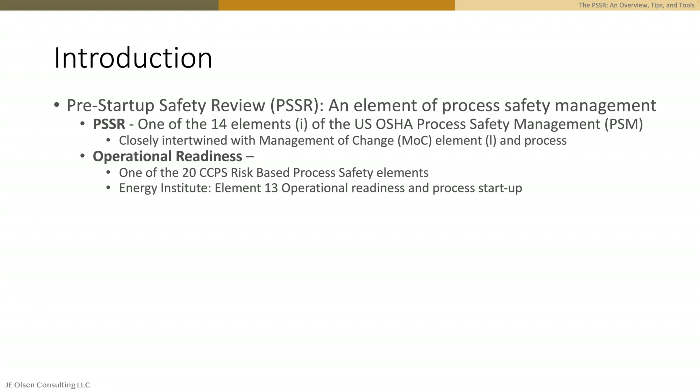To highlight the importance of operational readiness and PSSR, pre-startup safety review, we don't have to look any further than the tragic 1988 Piper Alpha incident, an example of a catastrophic event that stemmed primarily from a restart activity where the equipment was not operationally ready for that startup.

You may be aware that this incident involved equipment, specifically a relief valve, that had been removed from service for maintenance activity. It was loosely capped with a blind flange. When the pump operating in parallel went down and could not be restarted, the sister pump was started, and that sister pump was the one in line with the relief valve that had been removed. The blind flange that had been loosely attached at the location leaked and precipitated this incident.

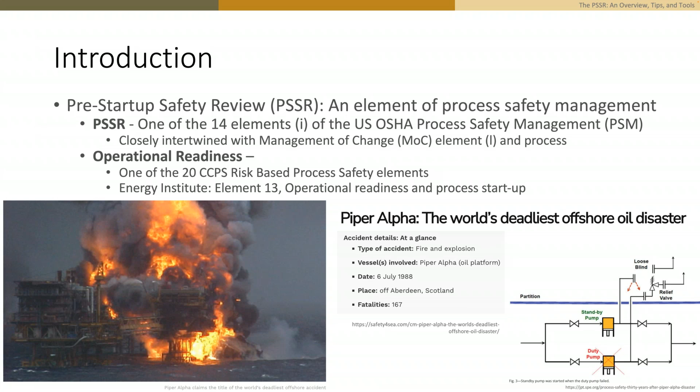Our purpose with pre-startup safety review and operational readiness is to ensure that the equipment returned to operations is safe and ready to start up and operate.

We want to ensure that all of the approved project design elements have been installed as they were intended. We go through great effort when doing MOC reviews, design reviews, and PHA to assure a thorough review. So the intent with PSSR is to make sure that all that work that went into the design actually is what ended up in the field.

When I say projects, I'm talking about everything from very, very large projects to the very tiniest little MOCs. So the full range and everything in between.

As was highlighted with the Piper Alpha incident, we also want to ensure that equipment is ready for restart following maintenance, inspection, and repair work. We need to ensure that the equipment and the safeguards are all in service and operational.

We know that a high percentage of failures occur during transient operations, including and especially startup. But it's not just during that startup phase that we're concerned about, because we want to ensure that we don't embed hidden or latent hazards into the process that may be exposed later through an incident.

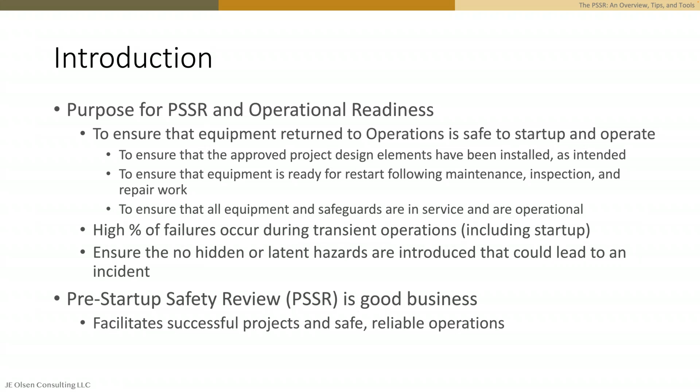I wanted to mention that a version of this talk was originally prepared in 2021 for the Global Congress on Process Safety, and an article stemmed from that talk which was published in Chemical Engineering Progress last year in June. So there is follow-up information available after the talk, and I can provide links to that reference information.

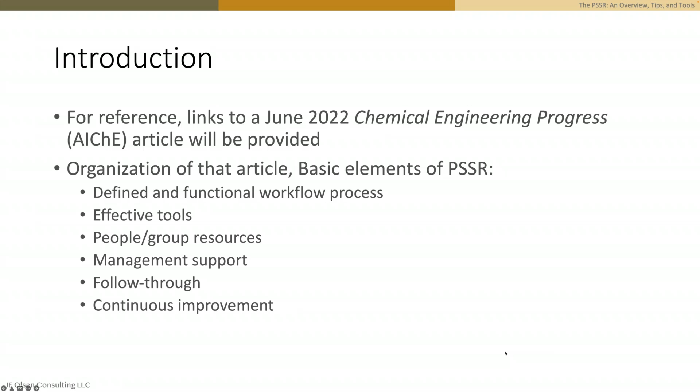In the CEP article, the article basically outlines the who, whats, wheres, whens of how we do pre-startup safety review. It's organized as you see here on the slide with these elements. The talk I'm giving today is organized similarly, but just slightly differently.

These are the points that I'm going to be walking through during the talk. The other thing I wanted to mention is that all of what I'm going to be sharing in this talk stemmed from actual work experiences in the field.

There were multiple instances I was involved in where we were having issues or problems with our pre-startup safety review process, and we were able to make changes to those processes, either a small tweak or maybe a complete overhaul. Following those changes, we felt we had a much more successful program. So that's where this information was derived from, and that's what I'm going to be walking through.

So I'll start with the first bullet on this list, the workflow process.

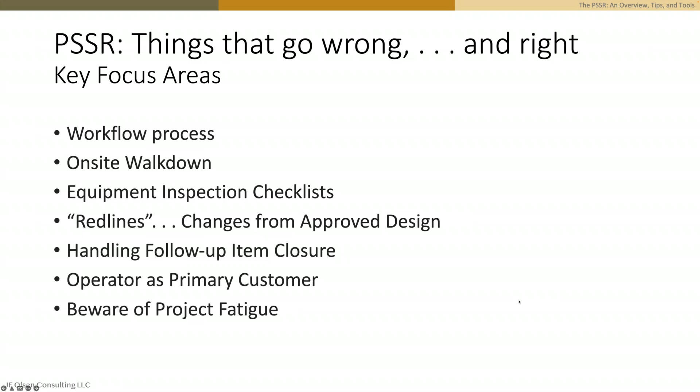One distinction I wanted to make with regard to the talk today and also the article is that both are geared towards the activities that lead up to that project turnover to operations. Now, depending on how different companies draw the line, there may or may not be final pre-startup activities conducted by operations immediately before startup.

All of these activities are absolutely critical PSSR activities. I did just want to draw the distinction that with the talk and the article, I am really focusing on leading up to that handover process, when the equipment is handed over or handed back to operations.

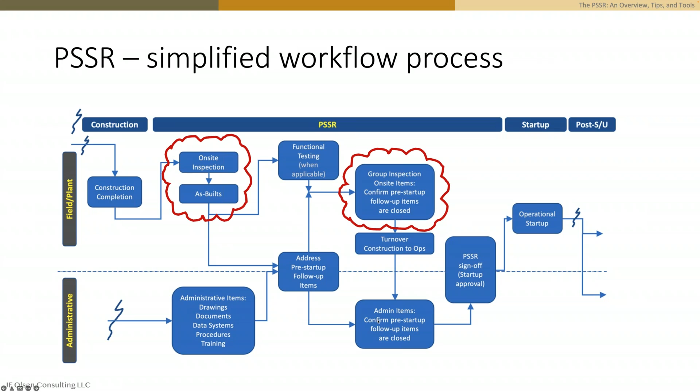I'm going to start out by talking about the on-site inspection process. The on-site walkdown, or the on-site equipment inspection, is a key part of pre-startup safety review. One of the first considerations you need to take into account is assembling the correct team. The on-site walkdown is inherently a multidisciplinary and multifunctional effort, as is the entire pre-startup safety review process.

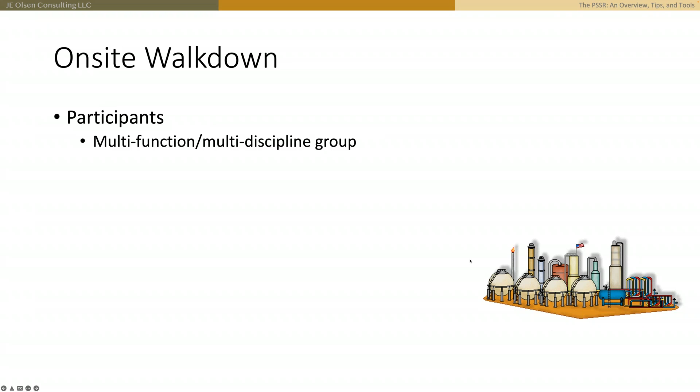It occurs at the transition point where a project team responsible for implementing a project is getting ready to hand over that equipment to operations, or likewise, when a maintenance group is getting ready to hand back equipment that's been inspected, repaired, or refurbished to operations. So it's very important to select a group of individuals with the proper skills, background, and experience to properly represent those roles and functions.

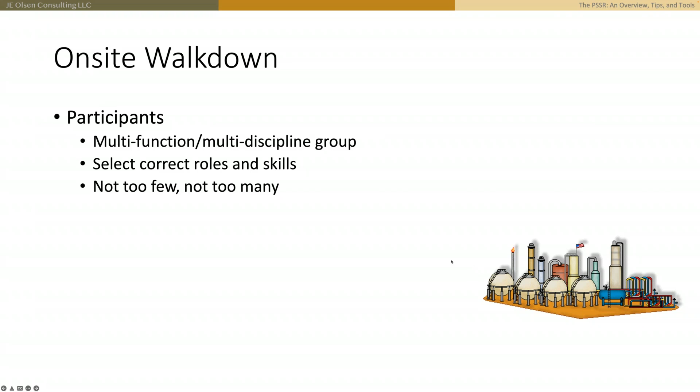You want to make sure the group is right-sized—not too small and not too large. Inherently, because this is a multifunctional, multidisciplinary effort, a single individual is not going to be sufficient to conduct the on-site walkdown. On the flip side, you want to be sure the group is not too large. When you have a very large group, individuals tend to get lost in the crowd, and so they may lack accountability or ownership and may be less invested simply because of the group size.

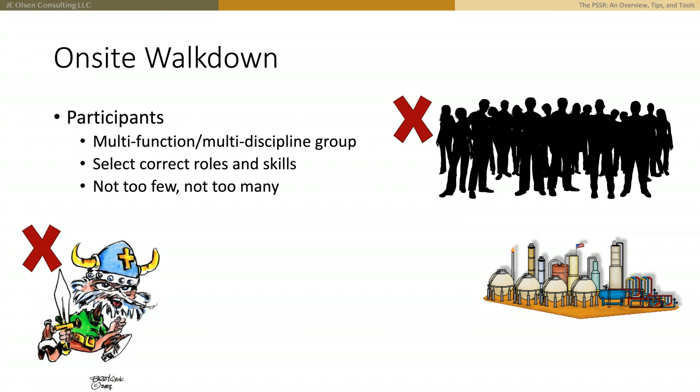There are also logistical and practical considerations for assembling the right size team to do an effective inspection in a plant environment, where that team of individuals has to be able to put their eyes on the equipment. So an appropriately sized inspection team is probably going to be on the order of 4 or 5 individuals, plus or minus, but probably somewhere in that range.

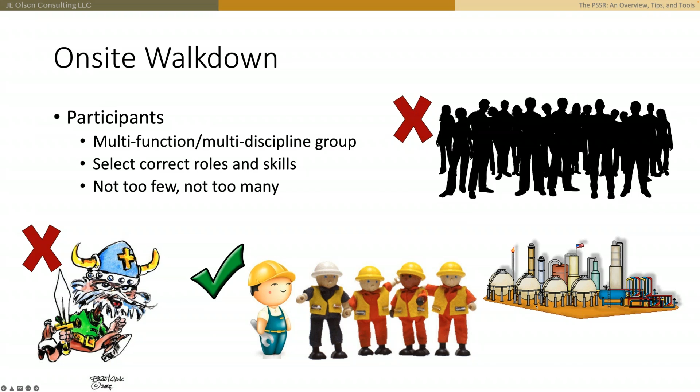Group walkdowns are an important piece of the overall PSSR process for projects of all sizes. It's important that all key stakeholders put their eyes on the equipment and walk the job down together. They need to be able to agree on what's acceptable and what items are not acceptable and will require follow-up either before or after startup.

So while the group walkdown is important and should occur on every PSSR, for projects that are slightly larger or involve equipment that's more complex, or may have functional testing requirements, an individual walkdown generally should precede that group walkdown—that's a good practice to consider. There's a couple reasons for this. The group walkdowns themselves are simply not that conducive to conducting a thorough and detailed individual inspection.

The individual team members will just not have sufficient time and space to conduct their own detailed inspections if they're visiting the equipment in conjunction with the group. They're going to probably feel constrained by group time pressures, group dynamics, and potentially groupthink.

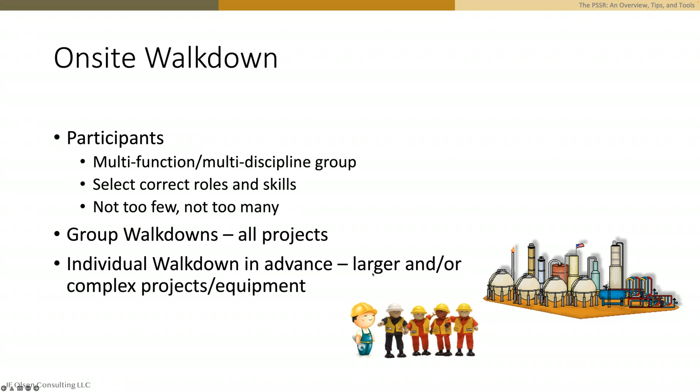The second reason for doing two separate walkdowns relates to making the PSSR process more time efficient overall. By conducting an on-site inspection first by individuals, and then assimilating their lists of follow-up or punch list items into a single list, those punch list items can begin to be addressed at the same time that functional testing occurs and some of the other activities are occurring.

Then that work is followed by the final group walkdown and confirmation that those pre-startup required items have been completed.

One note: in the article, I share an example of a workflow process for a small project where a single group walkdown may be sufficient. An example would be where you have a very small job with no functional testing required, and perhaps it's repetitively implemented.

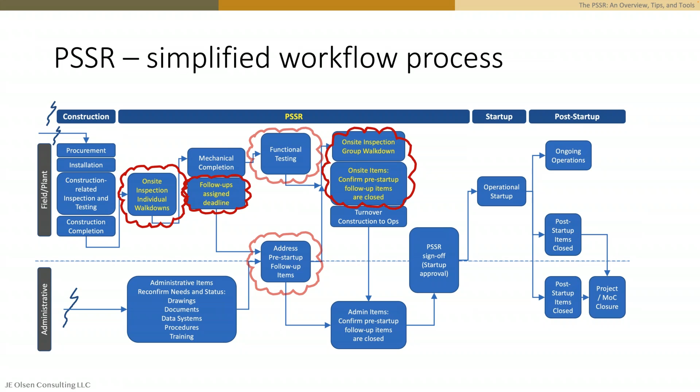An example would be a project I was involved with where we were replacing well flow lines throughout the field, but each individual flow line replacement required a PSSR and a group walkdown. So in this case, because of the size, scope, simplicity, and repetitiveness of those installations, a single group walkdown was sufficient.

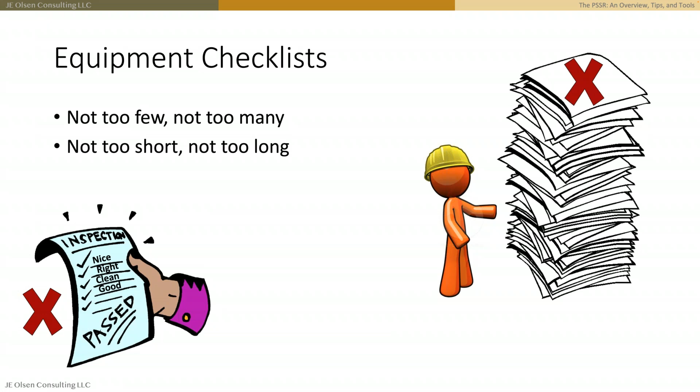Moving on to equipment checklists, you're going to begin to see a similar theme developing. You want to be sure that your checklists are not too simple, that they're specific enough for the equipment you're inspecting that they're useful, and that you have enough checklists to cover all the equipment types involved. However, you also want to make sure you're not overburdened by too many checklists or that they're too cumbersome or too long.

In the article, I provide an anecdote about a company struggling with their PSSR processes, both for their very small project implementations—the tiny little MOCs—and for their very large project implementations. They were dealing with problems on opposite ends of the spectrum. For their small MOC implementations, teams were only given a couple of checklists with very simple criteria, but they did not provide sufficient guidance to the teams doing inspections in the field.

On the flip side, the large project teams had some very involved project turnover processes—it was PSSR by a different name. They had lots of meetings, lots of forms, lots of signatures and sign-offs, and they were doing a pretty good job with functional testing, but with respect to equipment inspections and walkdowns, they were not inspecting equipment to a checklist that provided a listing of criteria.

As it turns out, they actually had binders full of very detailed equipment checklists. However, none of those checklists were being used. So it's important to recognize that the checklists used in the process need to be effective—they need to support an effectively implemented process that's not overly cumbersome but has a sufficient amount of detail.

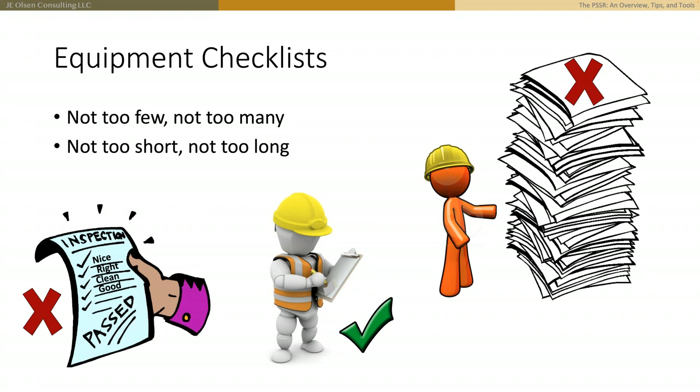Of course, there are limitations—you have to find the right balance. But the critical criteria should be shown, and the threshold defining what is acceptable versus unacceptable should be available. All unacceptable items will require follow-up.

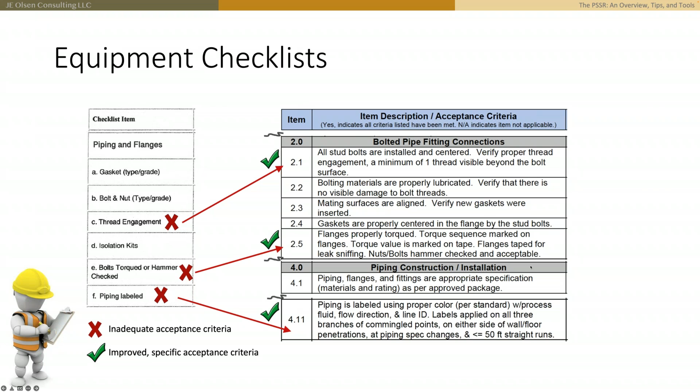Another important thing to recognize is that for any equipment type, it is the equipment that defines the standard it's installed to, inspected to, and tested to—not the implementation group. If you have a very small project installing a single control valve versus a very large project installing a large number of control valves, each control valve has to be installed, inspected, and function tested to the same standards. It's the equipment type that defines the requirements, not the group involved in the installation.

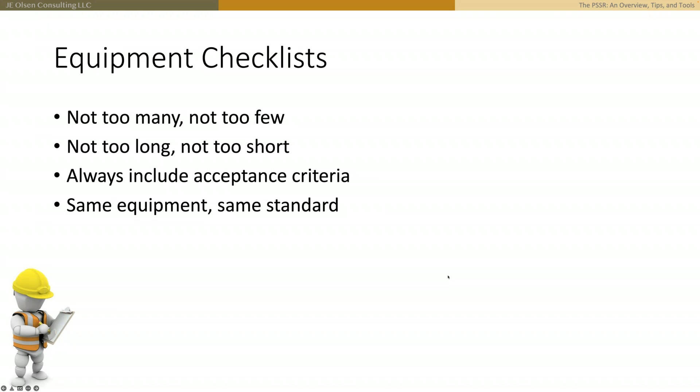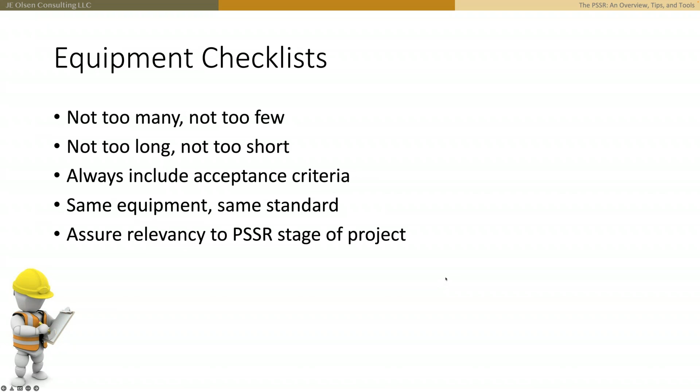Another thing you want to be cognizant of is the relevancy of the items on the PSSR checklist relative to the PSSR stage of the process. This is an example that shows a checklist with a lot of very important criteria on it. However, some of that criteria is not appropriate for the PSSR stage. Although these are very important items, they must be dealt with at other stages.

For example, relief devices and lines being adequately sized. Clearly that's a critical item, but it must be dealt with up front during the design stage of the process. During PSSR, we're not designing the project and we're not checking the design. What we're concerned about is assuring that the equipment installed matches the sizing and selection that was approved for the project. That happens through the on-site walkdown.

And on the administrative side, you want to assure that those checklists, calculations, and equipment data sheets are all gathered up and loaded into the proper accessible location, so that people have access to them after startup.

Likewise, sometimes there are items included on checklists that may not be able to be inspected after installation. Some of those items need to go onto pre-construction or during-construction checklists.

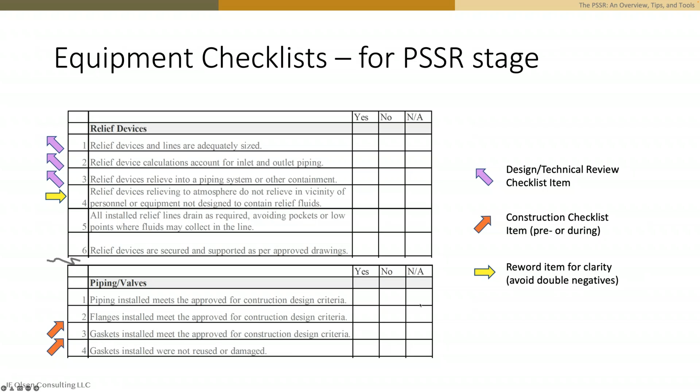So this is a very important slide. This slide addresses changes from the approved design. These are sometimes called red lines, and may be referred to as built, especially when the as-built drawing does not match the approved drawing. To reiterate, what we're talking about here are changes that have occurred to the design after the MOC reviews are completed and approved, after the process hazard analysis is completed and approved, and after the construction drawings have been approved and issued.

So we have to be realistic here. We live in the real world. We know that changes occur. That's real life. We have to accept that change happens. Yes, we recognize that, and we have to acknowledge that changes will occur. But the question is, were the changes approved through a fully equivalent process to the MOC process? And I want to put a caveat on that - to a good, thorough MOC process.

Sometimes construction groups, with best intentions, may design their own change management processes to deal with the myriad of change orders they have to handle through the life of the project. But if they do that, that process must be fully equivalent to the MOC review and approval process.

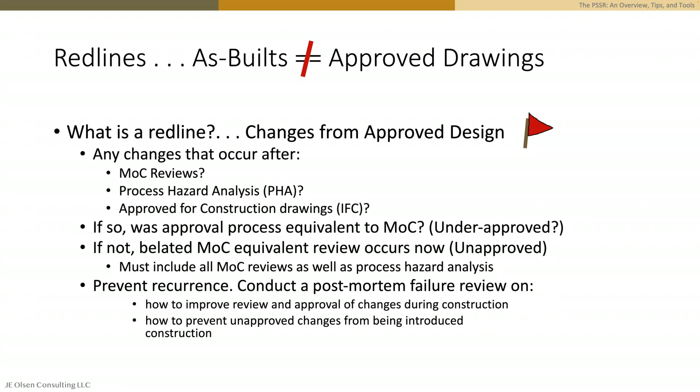So clearly, we want to avoid these unapproved and under-approved changes. Once we finally get through all of them and the project is completed, it would be a really good idea to do a full post-mortem review, including some sort of failure analysis, so we can try to understand why these under-approved or unapproved changes are being introduced into the process.

This slide is a little more straightforward and will be a lot quicker. This is addressing follow-up closure items, and I say that because we deal with follow-up items throughout our project. It's not unusual. We deal with follow-ups when we do design reviews, technical reviews, PHA recommendations. All of these generate potential follow-up items, just like the PSSR walkdown can. The important thing is that we deal with them correctly, completely, and that those things all get closed out properly. So when we find an item on the PSSR walkdown that requires follow-up, first we need to define several things about it.

We need to define the deadline, and importantly, we need to clarify whether that's going to be a pre-startup required item, or there may be a few that actually occurred during startup, or post-startup, or allowed post-startup.

In conjunction with that, it's a good idea to define what the drivers are. Is this a safety issue? Is this a compliance issue? Is this operability? Is this a policy or procedure issue or better practice? There very likely may be more than one driver, but that's good to know as we're defining the requirements.

We need to define an owner who will address this, who will take the lead, and we need to address the closure requirements.

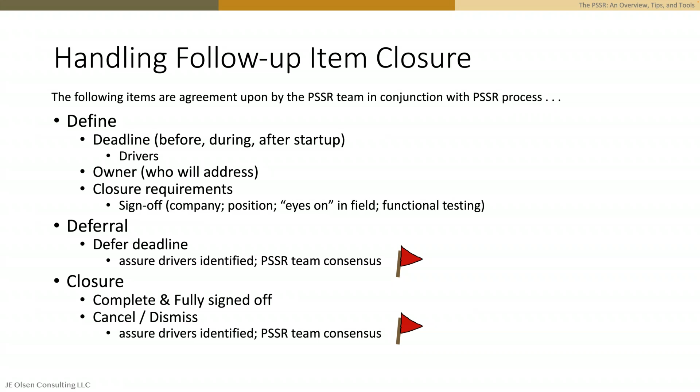With this slide, I want to highlight and emphasize the point that the client or customer of the PSSR process is operations, or more specifically, the operator. To make that point, I wanted to share another anecdote, one that was in the original Global Congress paper, but it didn't make it into the CEP article. I'll continue the story I mentioned earlier regarding the field-wide project that involved many well flow line replacements.

In this case, we're talking about a PSSR process that was developed not because of regulatory requirements, but because the operator customer was continually dissatisfied with the turnovers he was getting on this construction project, which was being implemented in multiple phases. So rather than letting our operator be continually frustrated, we got the group together and developed some PSSR criteria, developed the work process, developed a checklist, and began implementing that process.

That process included a group walk down involving the operator, the construction crew foreman, the construction superintendent, and the engineer. And at the end of the day, all of the stakeholders were much happier with how things were transpiring.

The operator was happier with his turnover, and that's saying a lot because this operator was not easy to please. He took a lot of pride in his work and had rigorous expectations. The construction crews were pleased because they were able to deliver to a satisfied customer, and they were happy to know what the criteria was that they were going to be measured on. And of course, I was happy as the engineer on the project that we had made these improvements.

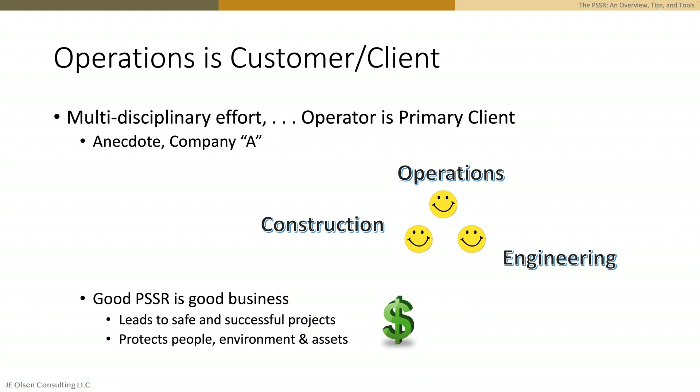This project occurred in an oil field where this part of the process was not regulated by OSHA PSM. So it just reminds us, and we want to recognize, that although PSSR is a requirement for certain regulatory compliance, because it allows us to have safe and reliable operations, we're going to protect people, the environment, and the equipment. Because we're protecting all those things, it leads to successful business outcomes.

And finally, I want to highlight the fact that, of course, by its very nature, PSSR occurs at the tail end of a project process. And you have to be very cognizant of the fact that people are tired at this phase of the project. Everyone wants to get this project completed, and there is simply project fatigue that has set in, and people just want to get the equipment up and running.

So it's very important, once again, to look for mechanisms and triggers to assure that the PSSR process is done in a thorough manner and that it's not given a light touch. Management and leadership are essential in this effort because management often sets the tone and in some cases sets deadlines or incentives that may push people for an earlier startup that can conflict with that goal. So the key is to look for mechanisms and triggers that can drive the opposite behaviors and incentives to encourage thorough review ahead of earlier startup.

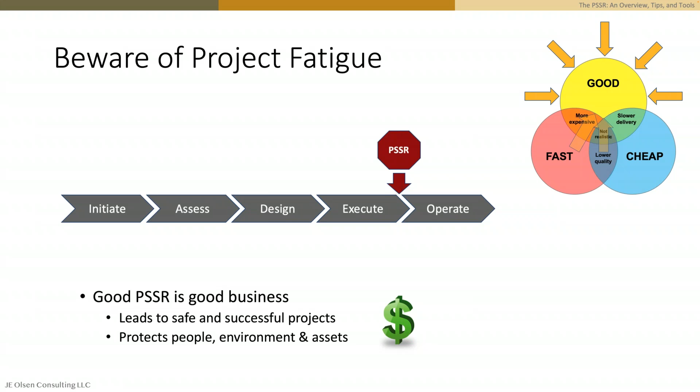And that just reminds us of the good, fast, cheap triangle. Remember, when we pull too hard on one side of the triangle, we pull away from the other side. So the other thing to remember is that fast is a relative term here. We're talking about how fast the PSSR is done, not the project itself. The PSSR will require the time it takes to do a thorough and complete job, and that's regardless of the overall timeline of the project.

So my final summary slide, and I'll just quickly go through and highlight the things that I've already spoken about here. And that's some things to remember about PSSR: we're looking to find the right balance, that it's not too big, it's not too small.

We're looking for the right number of participants on our walk downs. We don't want too many, but we can't have too few. We need the right number and scope on our checklist. We don't want a process that's so overly cumbersome that it weighs itself down, but it has to have enough information and detail on it that we can do a good job with our reviews in the field.

We also want to look at that workflow process. In most cases, we may need to have two walk downs, where an individual walk down is done first, followed by a group walk down, but there may be instances on some of our small jobs where a single walk down could be sufficient.

So we need to establish those effective on-site walk down practices, and those are supported through effective equipment inspection checklists. Again, I already mentioned having that criteria, good concrete criteria that describes the thresholds and the acceptance criteria.

We want to beware and really take a hard look at any unapproved or under-approved changes that have passed through the system, and those have to be dealt with completely, even while they're being done after the fact. And we want to be sure that we're doing complete follow-up item closure.

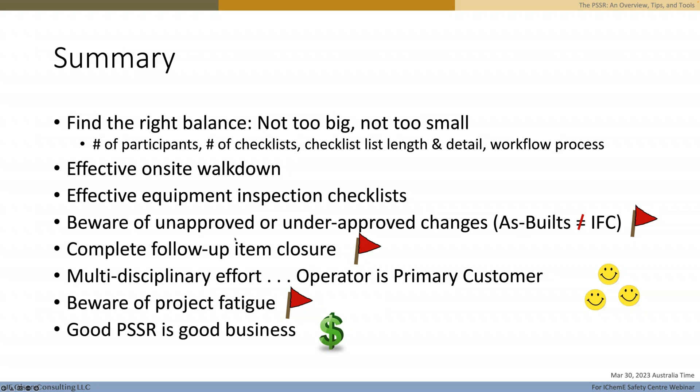Oops, that's not what I wanted to do. All right, I just clicked the link instead of the slide.

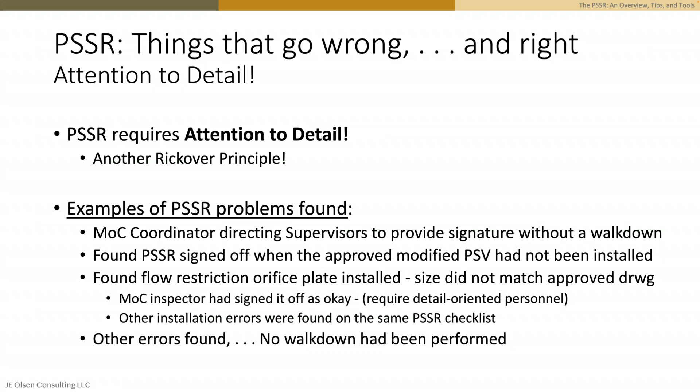So I'll go back to the other slide. That's all I have. If you want to ask any questions, please feel free to go ahead.